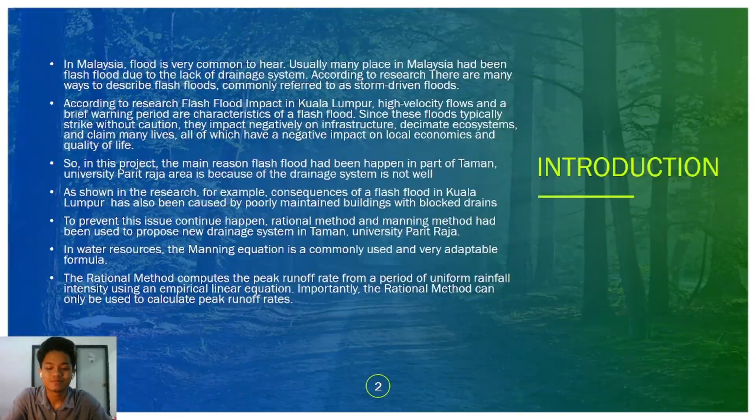Assalamualaikum warahmatullahi wabarakatuh. My name is Muhammad Faris Mifzal bin Abdul Halim and I will share about the methodology of our group project. So for the methodology, I have decided to divide the methodology part into two parts, which are off-site and on-site. So during the on-site works, we went to the drainage, which is at

the Taman University. We went and took photos around it as our progress photos. Next, we also measured the width of the drainage and the depth of the drainage. For the length of the drainage, we couldn't do it there because the length is too long, which is 489 meters. We measured it by using Google Earth.

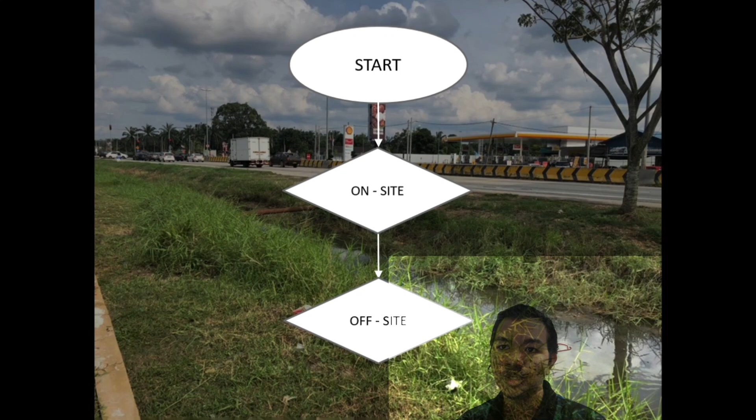Next, for the off-site works, first, we calculate using the rational method. So the first element in the rational method is the design ARI. To determine the ARI value, we determine it using MSMA second edition, by following the quantity design storm ARIs.

Next, for the catchment area, we determine how many catchment areas we want around the drainage. We can determine whether we want 3 or 4 areas. Then to calculate the total area, the areas of each small catchment area will be summed up. Next, the runoff coefficient C will be determined by observing the land use around the drainage. When we observe the land use of the drainage, we can refer to MSMA second edition also.

So next, we will calculate the rainfall intensity using the formula I equals lambda T to the power of kappa divided by (d plus theta) to the power of eta. So for the last one, we will calculate the Q peak, which is the flow, using the formula Q equals CIA over 360.

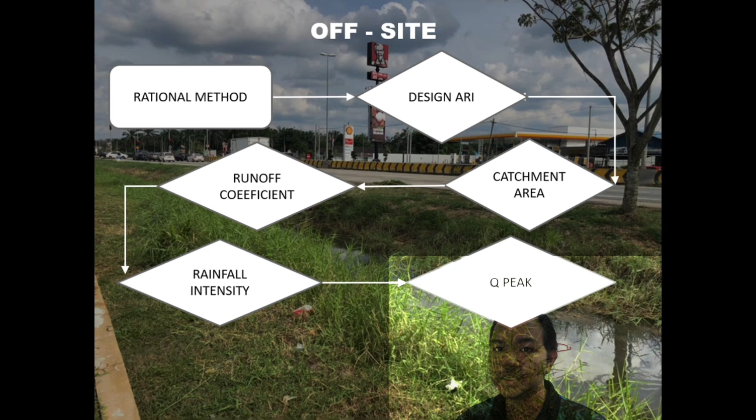Good day to everyone. My name is Joyce Inya Anak Jos, and today I would like to explain the analysis of the drain that we have found in Taman U by using the rational method. The first step is to select the design ARI, the average recurrence interval, which is 50 years.

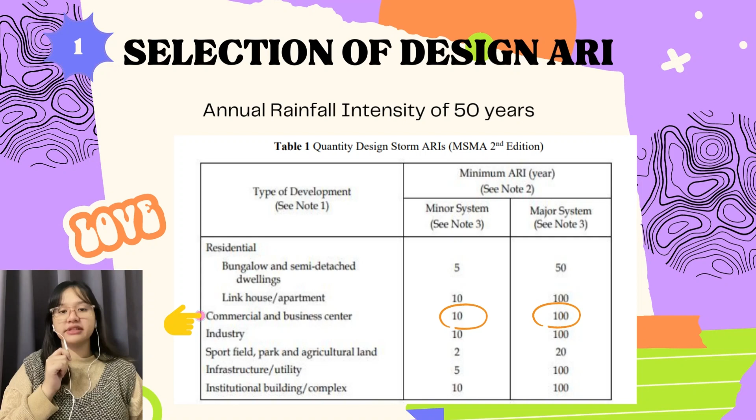We have referred to MSMA second edition, table 1, for commercial and business centre, where for the minor system the minimum ARI is 10 and for the major system it is 100. We have found the average to be 50 years and we have taken 50 years for our drain. Next is regarding the drain specification.

When we did our survey in the Taman U drain, we found that the drain has 1.8 meters of drain depth, and the width is 2.18 meters. The slide shows the drain drawing specification, in which the bottom width is 1.5 meters. From there, we found the area of the drain to be 3.312 square meters, and the perimeter of the drain is

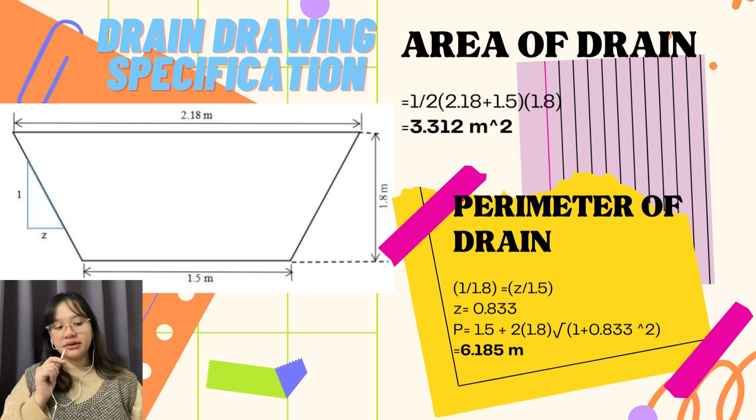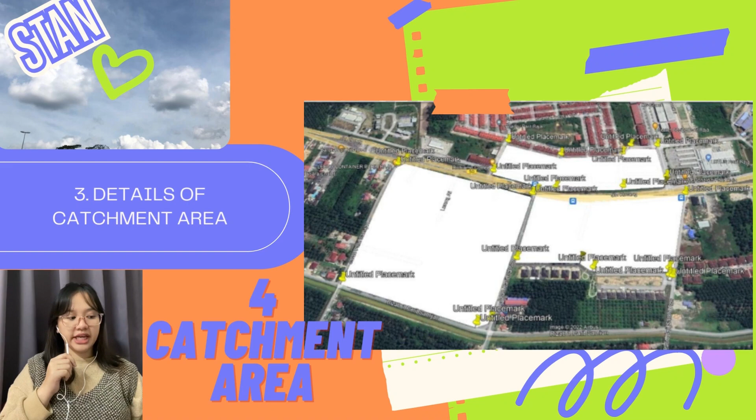Then we are required to find the friction slope. Still using Google Earth Pro, we found that the highest slope is 10 meters and the lowest slope is 8 meters. By dividing it by the length of our drain, which is 489 meters, we found that the friction slope is 0.0041 meter. The fourth step is to select the runoff coefficient.

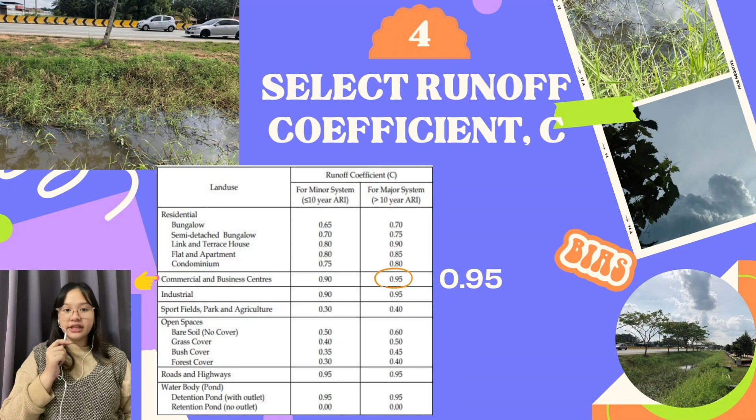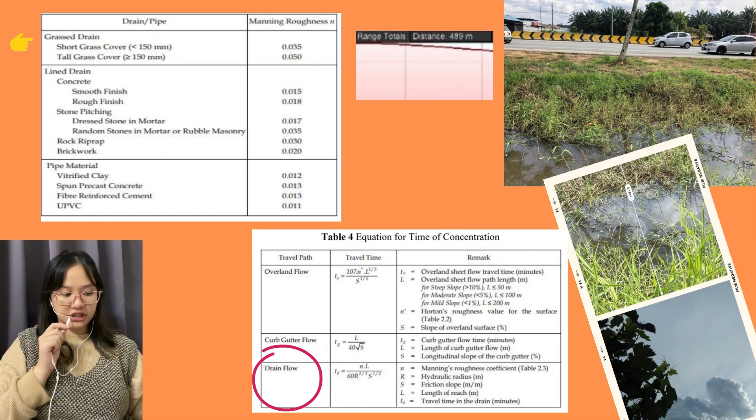By using the coefficient table in MSMA, we found that for commercial and business centers and for a major system that is more than 10 years ARI, 0.95 is used as the coefficient. By referring to table 4, we found that the equation of time of concentration is TD because we are going to find the drain flow.

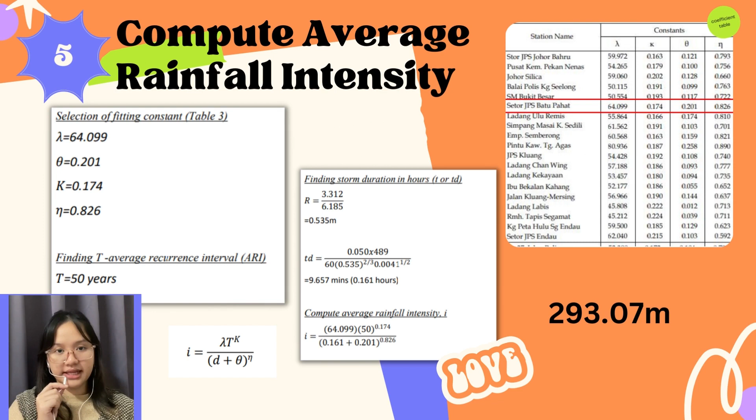Therefore, we compute the average rainfall intensity, and we found that the rainfall intensity is 293.07. The final step will be finding the Q peak, which is the discharge at peak. So, based on the formula shown in the slide, we found that the Q or discharge is 22.76 cubic meters per second.

Assalamualaikum, my name is Muhammad Faizi bin Manizam, matric number DF21056. I will explain about the proposal and conclusion. I will elaborate on the proposed new design, the reason, and the conclusion for this project.

Reason for inundation. The survey found that the location of the drain is densely grassed, which causes clogging and inundation. The drain may also be filled with sediment or clogged with debris due to being undersized. Therefore, a new design proposal should be implemented, taking into account that the peak flow Q peak should be less than or equal to the Q design.

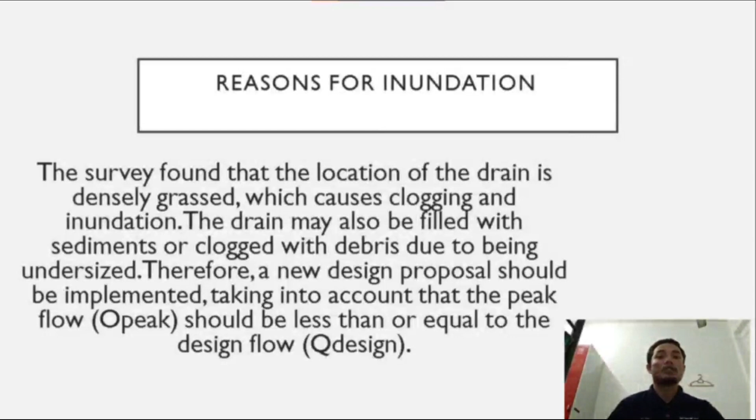And now I will propose the design for the new drainage. The problem of undersizing is addressed in the proposed design by considering a new trapezoidal drain measurement to increase the size. Building a drainage channel with sloping sides and a narrow bottom is recommended for steady flow speed as per sustainable sanitation and water management. The proposed design increases the depth of the channel and makes the slope slightly narrower to address the problem. The proposed drainage size is shown in the next slide.

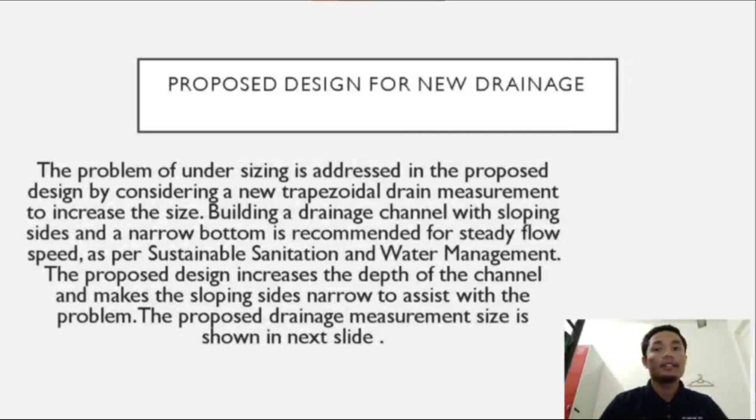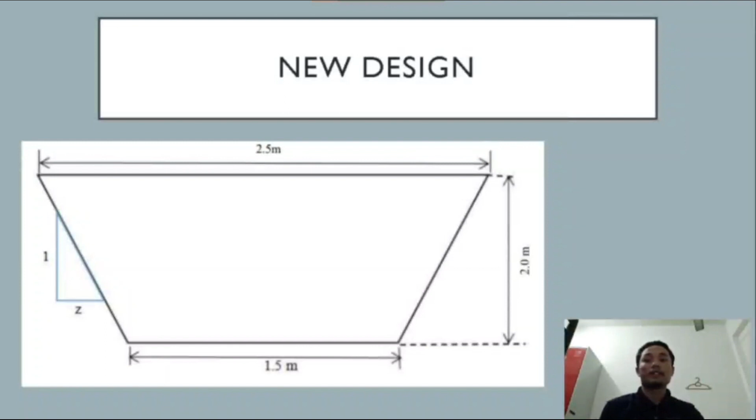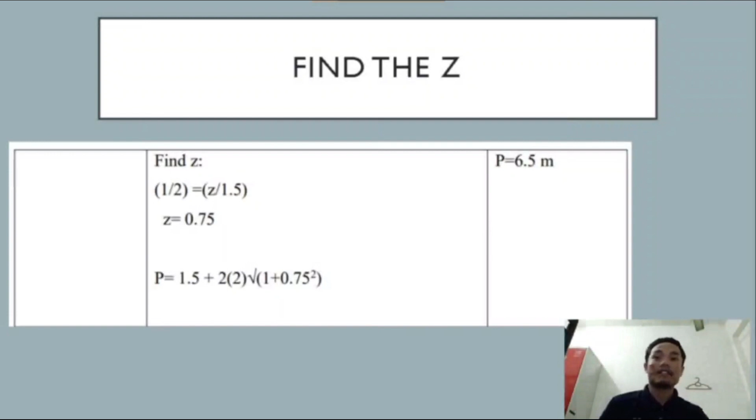Okay, this is the new design. For the top length, we take 2.5 meters, the bottom 1.5 meters, and the depth 2.0 meters. After we design, we must find the area of the drain. First, we must take the area. After we get the area, before we take the P, we must find the Z first. After we find the Z, we get the perimeter of the drain, and we continue the calculation to compute the average rainfall intensity. For this calculation, we can refer to the MSMA book.

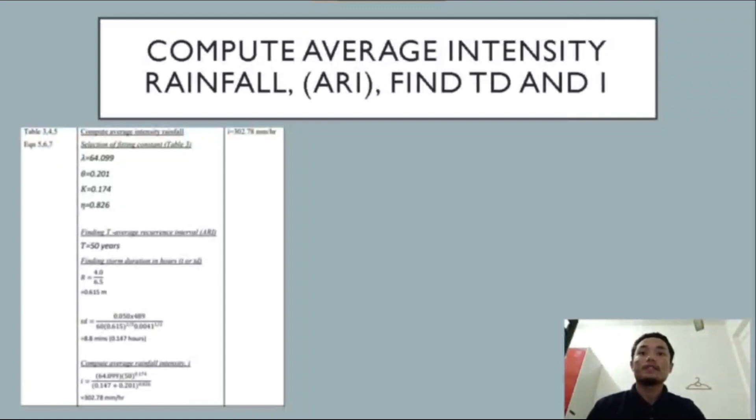For the selection of fitting constants, we can get table 3 for lambda, theta, k, and eta to find the average intensity. For the ARI, we take 50 years. Finding the storm duration, we get 0.615 meter. And for TD, we get 8.8 minutes, as 0.147 hour. Computing the average rainfall intensity, we get I of 302.78 millimeters per hour. After we get I, we can proceed to compute the Q design.

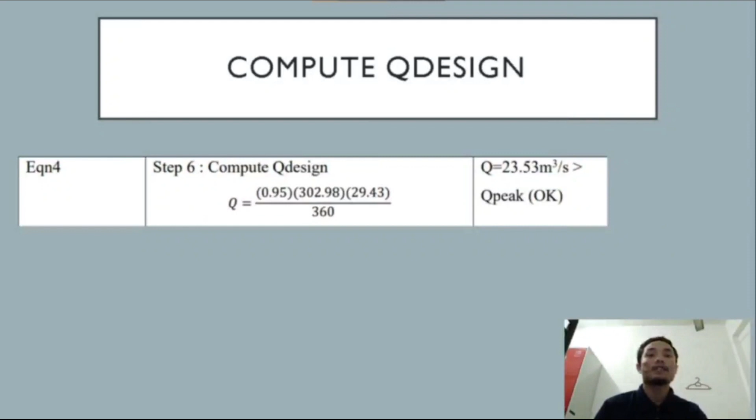After we get the Q design, we will compare whether the Q peak is okay or not. Lastly, we can conclude with other mitigation measures to prevent inundation. Other mitigation measures will be taken in addition to the proposed design change after full consideration of the condition of the drain. The landscape of the drain route will be kept clear by trimming grass and other plants so the routes are not clogged. Finally, the drain may be clogged due to the poor condition of the drainage system.

This contributes to the clogging of the drain. Therefore, it is important to consider the sizing of the drainage as well as maintaining the cleanliness of the drain to avoid inundation and allow good surface flow.